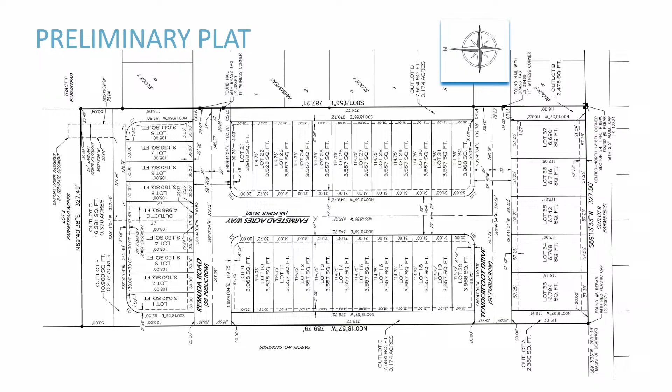Here's a copy of that preliminary plat again, just rotated so north is to the left. If we need to come back to this and look at any acreages, we can do that. The adjacent properties and the compatibility - we feel this fits in very well with the neighborhood and the blend occurring out there today with the different uses.

From the east side we have residential single-family detached, on the south as well. To the west, there is a plan - this is currently in the county, but there's a plan that this will also be urban residential. And of course we have industrial to the north. So we are buffering that area with our detention, and we have an alley proposed in our current layout. We feel, as was stated, we're meeting the town's technical criteria, the previously approved rezoning and neighborhood plan, and the plat that has been put together.

This project, we feel, will provide housing diversity and attainability with the product being proposed. We have separation from the industrial uses, and we're extending roadway infrastructure, completing a missing link through these fields. Ultimately, when the property to the west comes in, that connection can also be made.

Our home scale is very similar to what you see around us. They are duplexes in the northern part of our project, but the scale will be very similar to single-family homes out there, just paired. The homes on the south will be aligned with what you're seeing out there today.

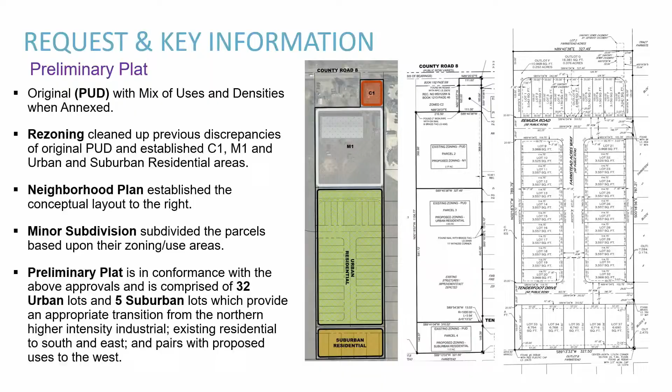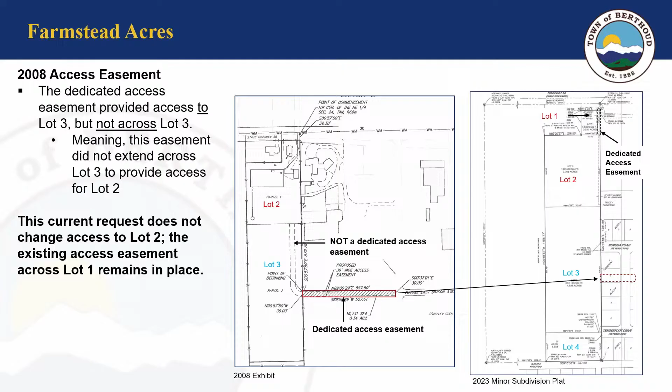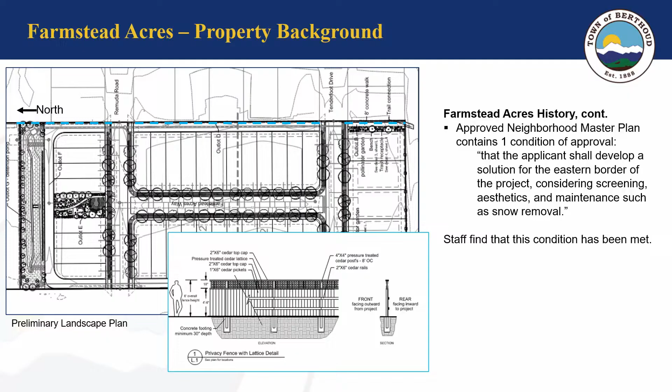One option is approval as it is currently structured, this preliminary plat. Another is approval with some of the proposed changes. We are able to deny the application, or we're able to continue it so it could be taken up again at the July 10th meeting. So the continuation would be, thank you very much, Anton.

If we feel that the preliminary plat is going to change to such a dramatic effect that it's not reasonable to make a decision on the application tonight based on the new information we've gotten in the last 24 hours.

Okay, so with that being said, sorry to make you change the slide again, but could we go to the criteria for approval, please? Chair Smith, are you referring to the criteria for approval? Sorry, criteria, okay, yes. Sorry, thank you.

Thank you. Okay, so let's have some deliberation before we start stepping through the criteria. Have any comments or impressions they want to share?

I did notice that there was a minor modification to include a second trail connection. Is that part of a master plan? Yeah, so there is a trail directly to the south, and the original neighborhood master plan only had one 8-foot trail connection on the east property line.

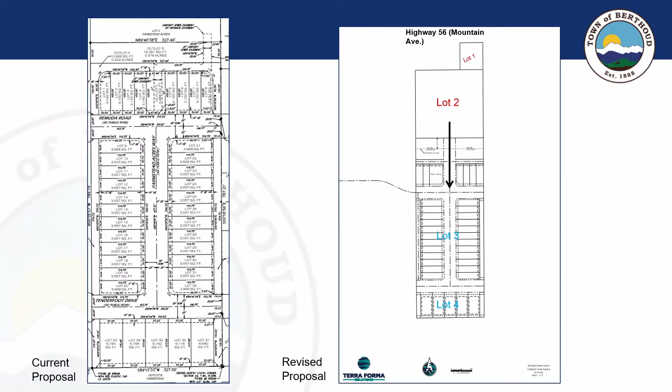I think it's very difficult without knowing the use of Lot 2 and what specific traffic is going to be going through this residential area. What kind of commercial traffic is, and again, I don't want to hold them up because Mr. Bond hasn't submitted. No, absolutely, I'm just thinking any type of industrial property, and I'm not sure what kind of activities is being done there, but more than likely there's gonna be some type of semi-activity, box trucks and stuff like that.

And in the comprehensive plan, let me ask this a slightly different way: Lot 2, what is it zoned in the long-term comprehensive plan? Is that supposed to stay industrial? Oh, so as the future land use map? Yes. I believe it's urban. Let me take a quick look.

So it's either— Well, I want to make sure if we're making accommodations to put industrial, that really the long-term plan for the village is to keep this use this way, right? I don't know, if it's gonna be residential, then it makes sense to put a road there to attach at some point, or then we don't have to worry because they can go off of Mountain Avenue.

That's true, they don't need to— well, maybe. But they said it's a residential access to Mountain Avenue. Yeah, but what is— oh yeah, but they would have to widen it or do whatever, turning lanes, yes. Only if it's for commercial.

So this portion of the property, Lot 2, is technically on the future land use map urban residential, while Farmstead Acres is suburban residential. And keeping in mind that the property was rezoned in this configuration in 2023, as part of the overall Farmstead Acres minor subdivision and neighborhood master plan at that time.

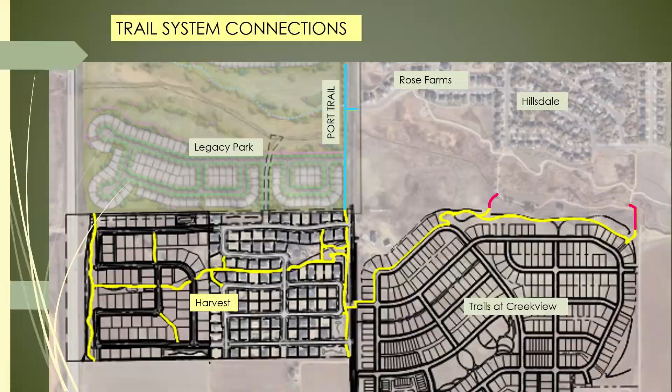As far as public facilities and community benefits, one thing we pride ourselves on is having no metro district. It's rare for a developer to present a project without one. There are reasons developers propose metro districts, but we try to keep things simple enough to not need that financing tool.

We have HOA management of all the amenities, and we work with the Larimer County Sheriff. We've installed flock safety cameras at our two points of entry and egress, and the town is working with them more widespread across the town. It's been a great resource and has eliminated a lot of issues we had been seeing on the project before.

Due to the demographic of buyers coming into the area, we envision a total of 39 students contributing to the school district. We also pride ourselves in giving back to the community through various local funds.

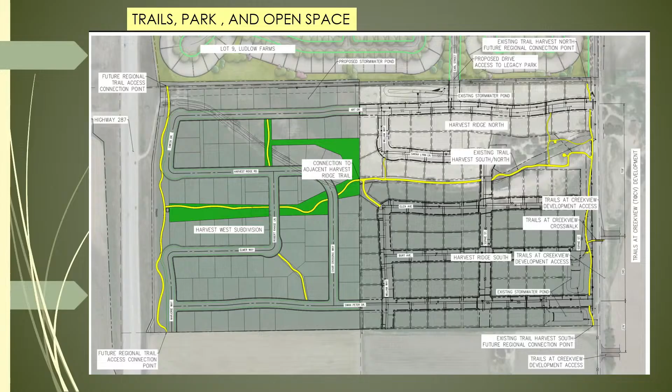Is it attached? It will be attached, yes, with a common wall. And sold as one lot? Right. How big are those lots? Those lots are around a half an acre. So they've been chosen specifically for their size? Yes, we picked corner lots that would work well with that.

So would they each use their own garages as well, so it would really be more like a duplex? Yes, I would envision that, and it falls a lot on the builder to design what they feel will best sell. But I would envision the garage separating the two spaces with a firewall in between, and in a lot of cases a shared driveway going to those two separate garage spaces.

So will the HOA have any special restrictions that they cannot be used for outside rentals, or will we just be following standard rentals? Currently long-term rentals are allowed within the HOA if somebody owns their house and has to move. What about short-term, like Airbnb or weekly rentals? We don't have anything written in on short term. When we established the HOA, that wasn't as much of a hot topic.

So we would evaluate that and work with the town on making sure any short-term rental requirements would be met, if that's something the HOA board would decide to incorporate into changes in the HOA guidelines. Anton would be our resident expert on that. Yeah, I would love to work with that.